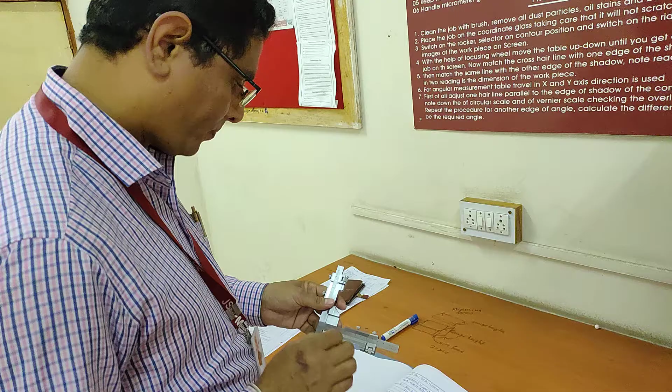Good afternoon, students. Now we are going to perform the next practical measurement of spur gear parameters using gear tooth vernier caliper.

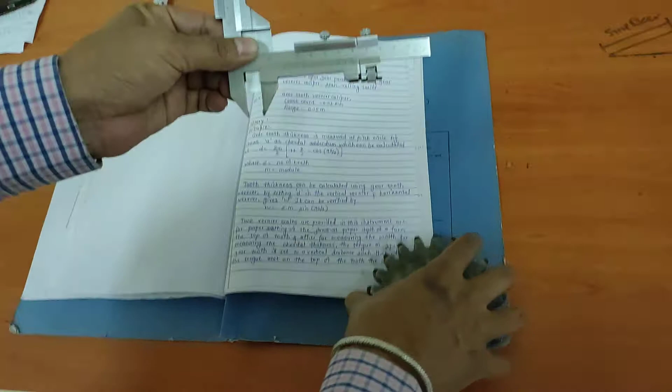So I am going to detail one by one as gear. This is the gear, normally you will get to measure the tooth thickness as well as tooth height.

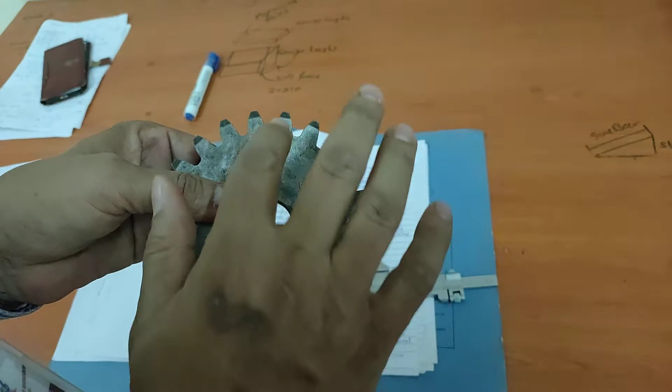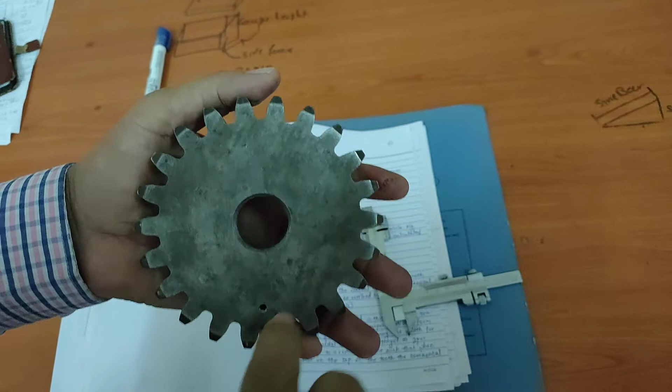Now see this is the outer diameter of the gear. We are going to say that this is the addendum. Then this bottom edge of the gear tooth is called dedendum, and an imaginary line or circle passing through this addendum and dedendum is the pitch circle. That value we have to calculate.

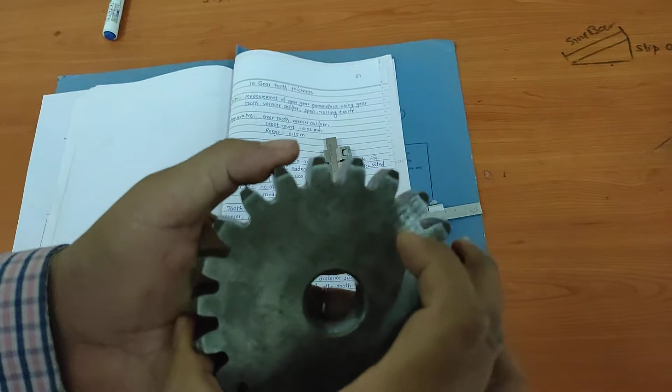Now module, I am not going into detail of the module. Everybody knows module means pitch circle diameter divided by total number of teeth. This is the formula for module.

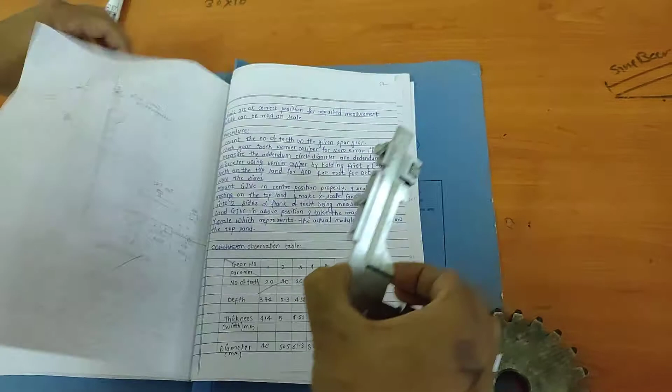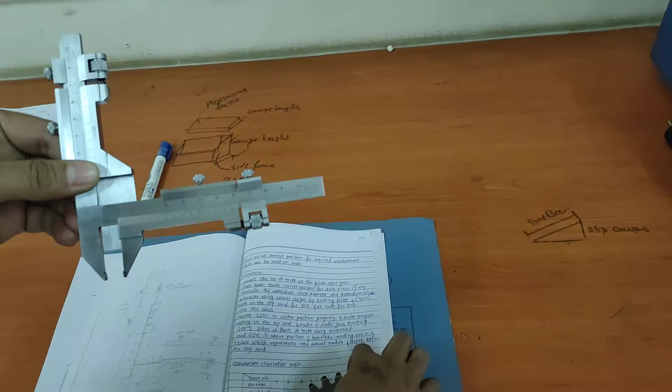Now the second apparatus we are going to use is this vernier scale, a combination of vernier scales particularly used for measurement of the depth of the tooth and the thickness of the tooth. This vernier scale gives me the tooth thickness, and this vertical vernier scale is going to be used for the height or depth of the gear tooth.

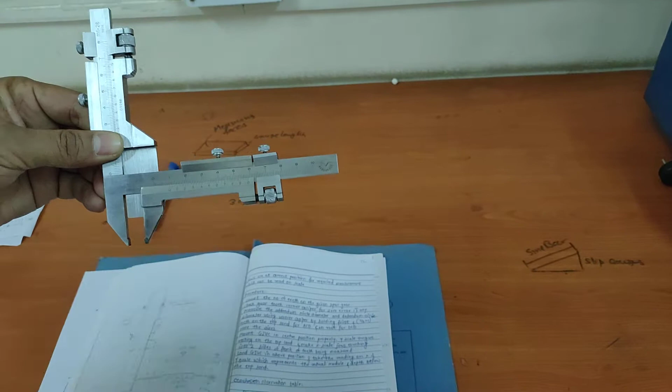While carrying out the practical, we have to take precautions. This is in vertical condition and this is in horizontal condition. If we use it like this, then you will get a wrong reading.

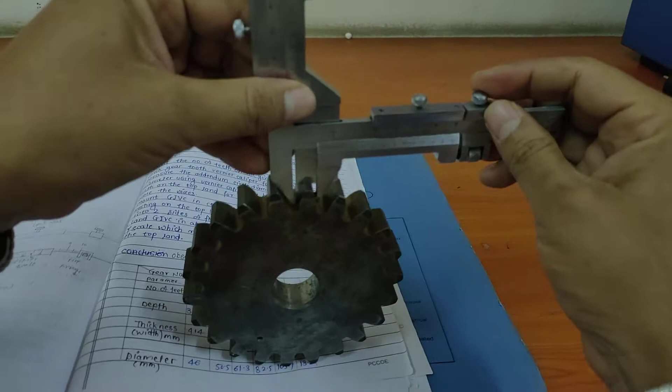Now we are going to follow the procedure for how to carry out the tooth thickness measurement. We are going to insert the vernier scale like this, then gradual movement using the fine adjustment screw. First I am just showing the arrangement.

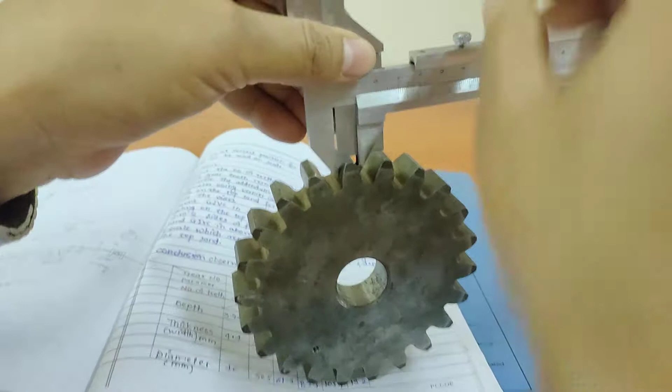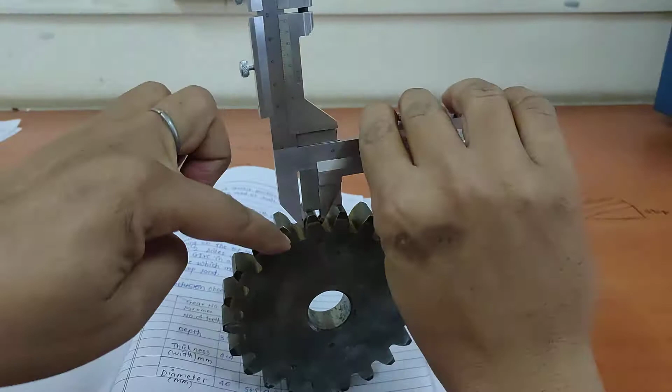This is touching the flank, and we can note down the reading of the thickness of the gear tooth, and this vertical vernier scale gives me the reading of tooth depth. So first we carried out the first reading, tooth thickness, and we took the readings on this.

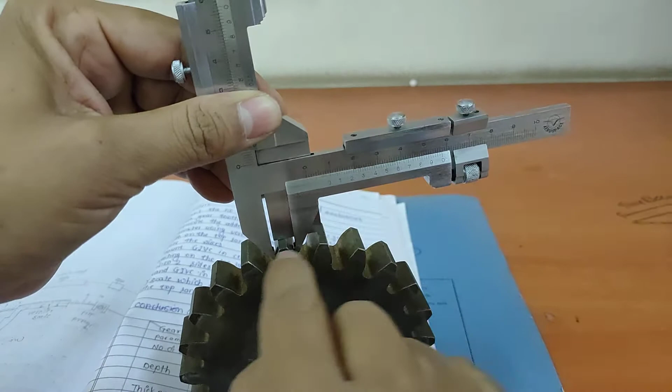We have already discussed how to take the reading of the vernier with the help of the vernier scale. So the main scale reading, plus the part of the vernier scale which exactly coincides or matches with the main scale, multiplied by the least count, gives you the value of the tooth thickness. This is the first reading we have to carry out.

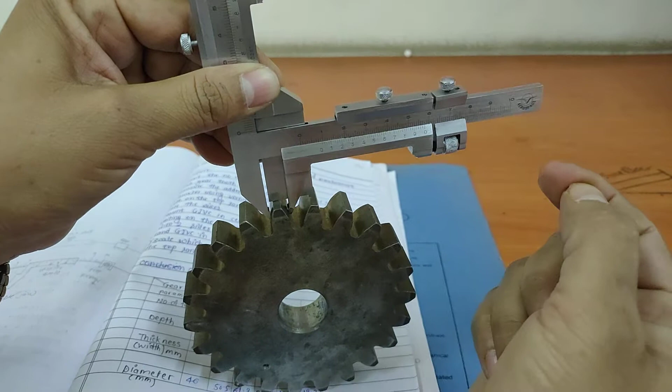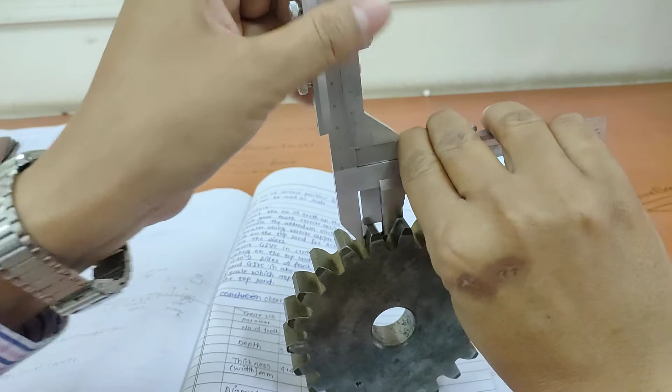Then second is tooth depth. I remove the adjustment and insert this jaw, then with the help of this lock nut I lock it, then fine adjustment. Now just ensure that this is going to touch the bottom end of this flank of the gear tooth. Then this is the second lock nut, I am just fixing it. This is the fine adjustment I have mentioned, and then we have to take the second reading.

Similarly, the same procedure we have to follow as discussed for practical number 1: main scale reading plus least count of this vernier scale. Here I already mentioned the least count of this vernier scale, multiplied by the division on the vernier scale which exactly coincides or matches with the main scale.

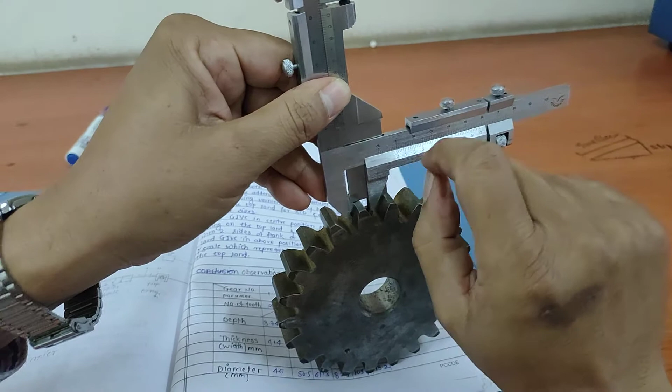So I have already carried out the readings, several different readings. We will go in detail one by one, and then you can understand what is the procedure and method, and the readings you will get to know.

So we have taken several different gears, with number of teeth for different gears which we have carried out for the practical purposes. Number of teeth are 20, 30, 26, 50, 66, 52. Different gear numbers, 6 gears we have used along with different tools.

Depth of each gear we have calculated: the first gear, having number of teeth 20, depth is 3.74 mm, and thickness, sometimes called width, is 4.14 mm. Diameter, as I already told you, we are not going into detail of the diameter. Diameter is 46.

So similarly, we have carried out the second set of readings for another gear having number of teeth 30, depth is 2.3 mm, thickness is 3.

Then the third gear, having number of teeth 26, depth is 4.58 and tooth thickness or tooth width is 4.68, diameter is 61.3. How do we calculate diameter? We are just attaching the vernier scale end to end and then we can come to know the diameter.

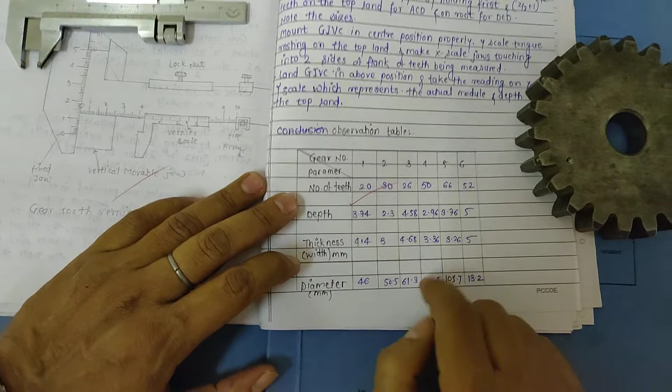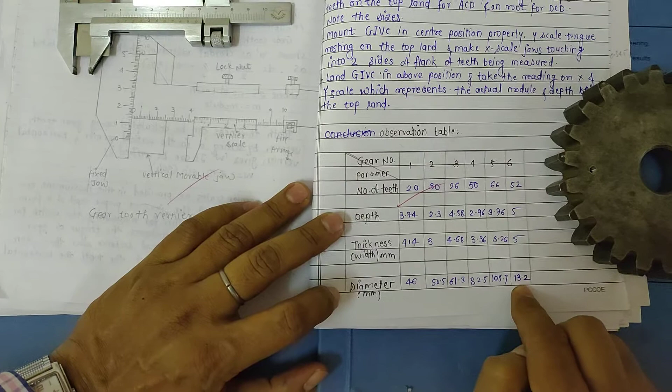Similarly, for the last set, total number of teeth 52, depth is 5 and width is 5, and the diameter is 132.2 mm.

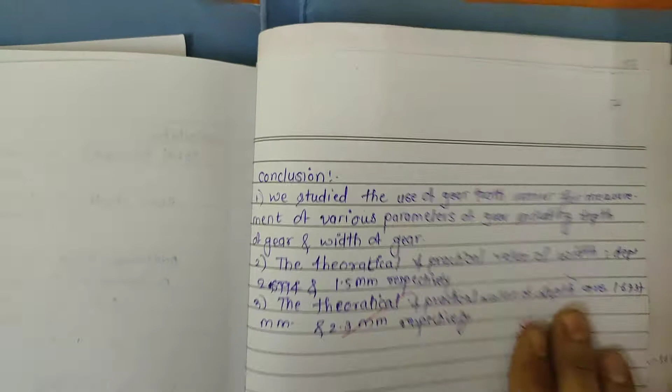So this is the use of the gear tooth vernier for measurement of various parameters of gears, including depth and width of the gear. The theoretical and practical values of width and depth have already been calculated respectively.